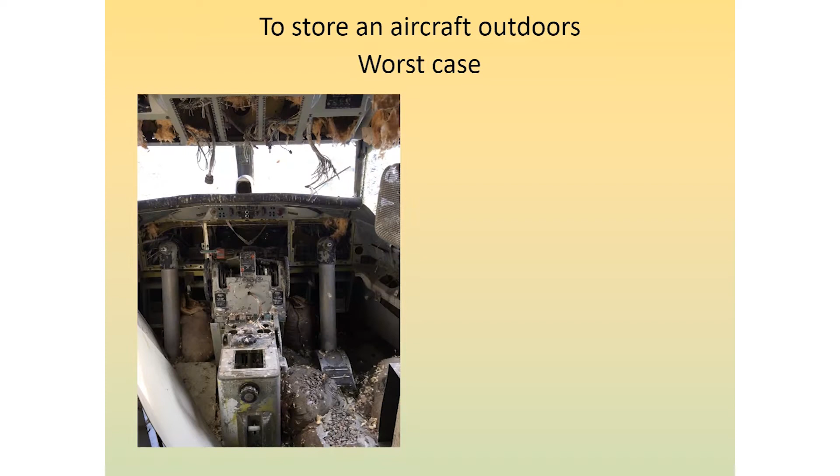This is the worst case of outdoor storage. This is a Metropolitan, Convair Metropolitan. I wouldn't say it is stored - it's sitting at Bromma Airport, and it has been there since 1977, in that shape.

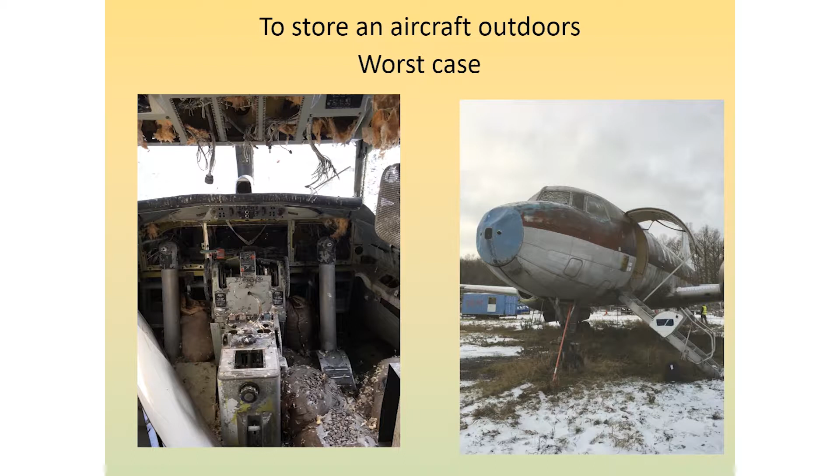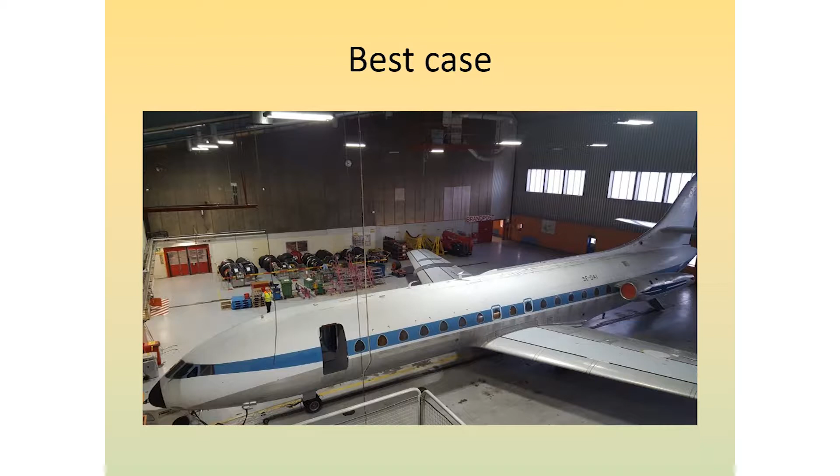That's our next project. Our best case would be to have it inside somewhere, but we don't see how it will be accomplished. This is our case.

It is stored presently at the air side of Arlanda, which means access is via the normal security procedures and a 10-minute walk. We have visitors 50 times a year or so, and everyone has to request prior permission. However, the staff at the airport is very interested and helpful in every way.

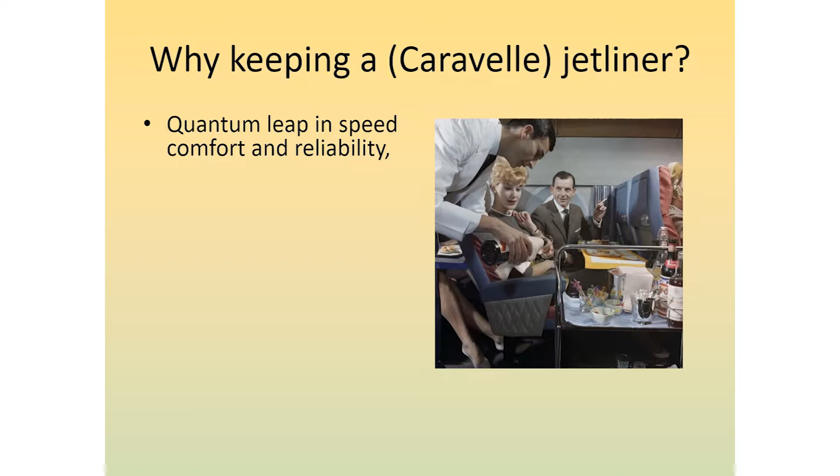Why do we keep a Caravelle? Why is it important? Because it's the only airliner kept in Sweden, and it represents a quantum leap in speed, comfort, and reliability. Less vibration, less noise - you're leaving the noise behind you, flying high over the clouds. The Caravelle does about Mach 0.65, at 30,000 feet, with very little vibration.

Vibration is interesting, because in the old piston-powered aircraft there were vibrations from the engines, propellers and so on. But in the Caravelle, very little vibration, and that had the effect that the electromechanical instruments - sometimes you have to knock on those. So if in those days you asked the guy, 'what time is it?' and he went like this, you're a Caravelle pilot.

That means during this time, safety has improved by a factor of 10 or so. If you scale that to today's traffic, it would mean that with this kind of risk level, every year we'd have 150 to 200 aircraft losses, many with fatalities. So the jet era represents a very large step towards higher safety. That's important to know.

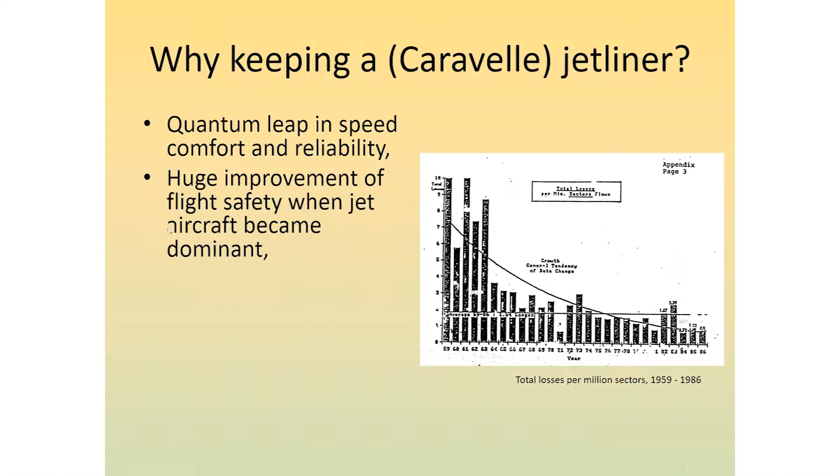The Caravelle is technically innovative: hydraulic flight controls, no wires, only hydraulic lines - unlike the later Airbus, which are electric. Rear-mounted engines, rear stairway, like that. So those are very new items and features for the Caravelle.

And the window design is interesting too, because we have the broader base down below. That means you can have better visibility from the cabin on the ground.

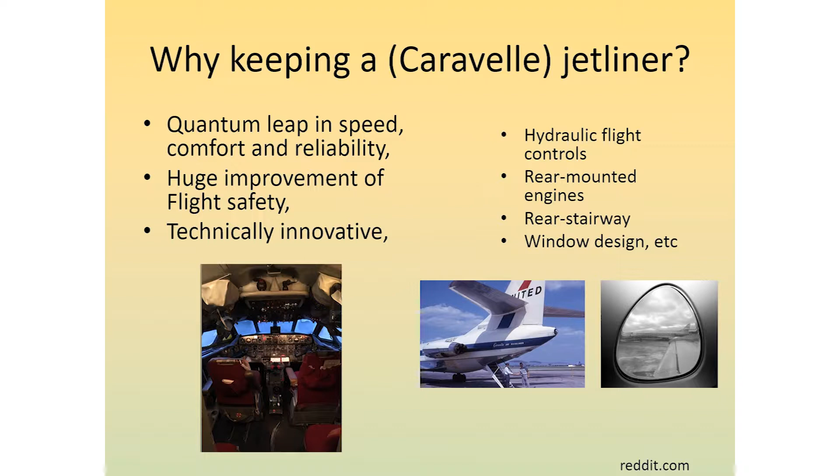And it's also an example of UK-France cooperation. This is the de Havilland Comet, and in fact the nose section is bolt-on from Comet to Caravelle. It's the same cockpit.

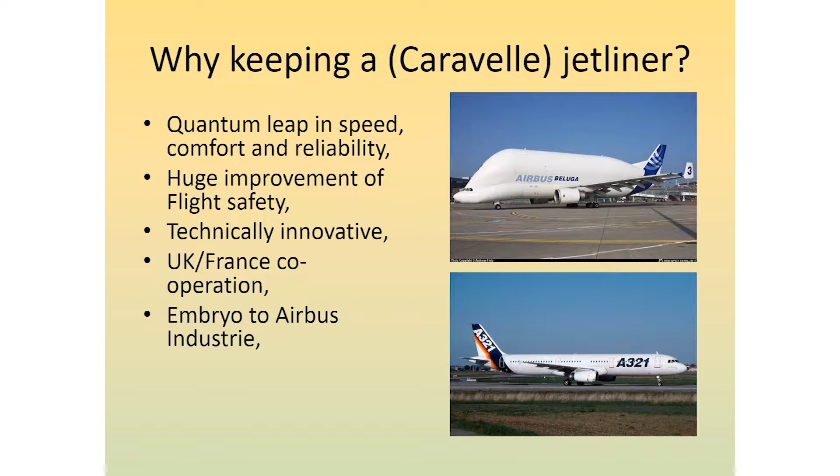And it's also the embryo to Airbus Industrie and Airbus 321, and this ugly one. So it's interesting just to keep the Caravelle. It was also the premier jetliner with SAS in 1959, and it's beautiful, isn't it?

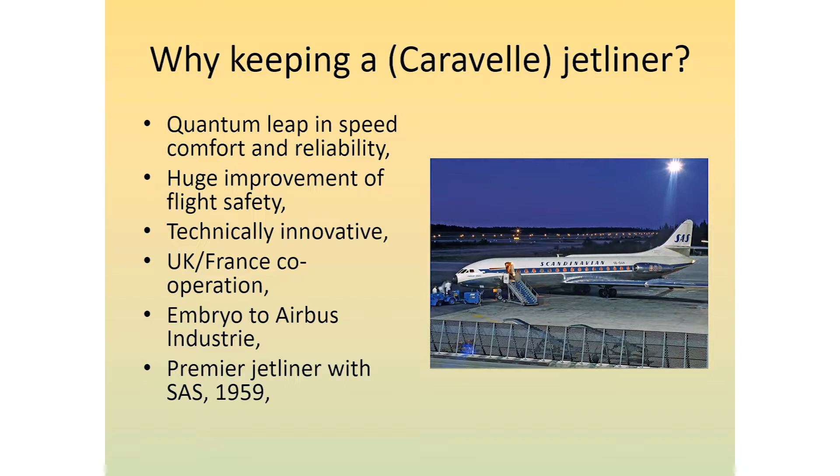So that's why we try to keep this one. We keep this Caravelle in serviceable condition, and that's important. That's interesting, because we try to keep all systems go.

This example was delivered to SAS in '66 and then to the Swedish Air Force. It was only 5 years when it went into the Air Force, so it was a new one. And then to the Air Force Museum in '99 and on, and we were given right of disposition and the storage agreement in '99.

However, we have 8 containers of spare parts at Arlanda, and the club bought those from the Air Force for 1 krona back in 1999 or something. And that is a problem, because they are crowded with boxes, with flaps, leading edges, wheels, landing gear, and so on. We can't even get into some of those, so that's a problem to have all those containers.

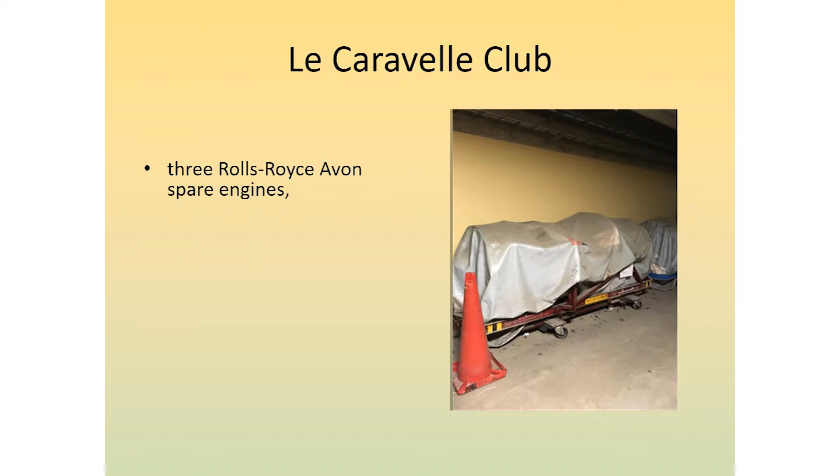And we have 3 spare engines, at least 2 of them are serviceable. And who needs a Rolls-Royce even today? If you have a Hawker Hunter, maybe.

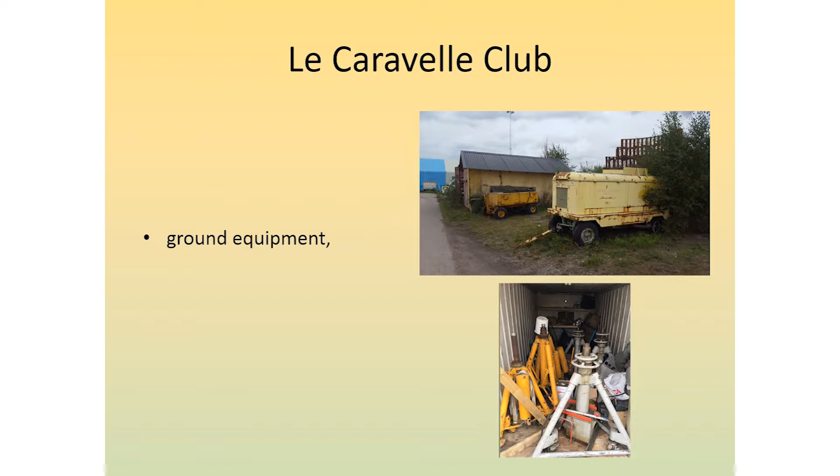We have ground equipment. I don't know how they got in possession of all this equipment, but it's a problem. We have got rid of some of them, but still we have very much items that are surplus that we don't need. We have sold some of them or leased out.

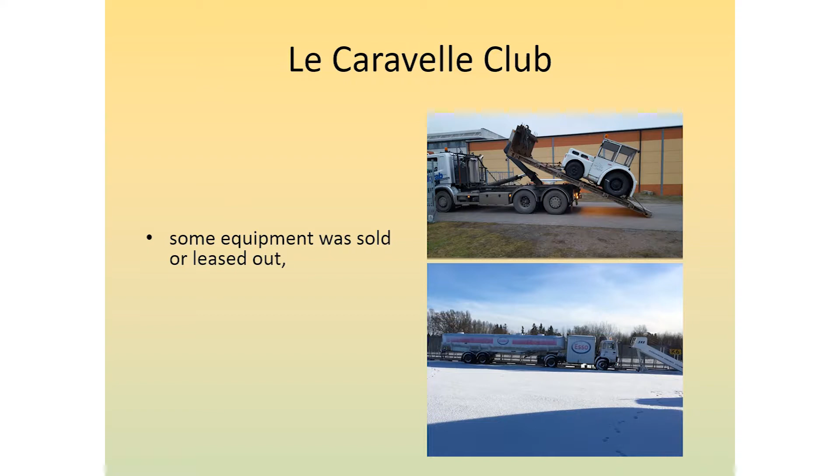That fuel truck was a big headache during the spring. It was at the airside of Arlanda, and Swedavia Arlanda were more and more pushy that we should get rid of it. We couldn't give it away, we couldn't sell it, we couldn't do anything with it, because just think of that one on the street — you fill it with some kerosene, you have a hand grenade or igniting thing in it, and just drive it into a crowd or something. So that was a real headache. We got rid of it to a scrapyard.

Yeah, we have an office at Arlanda. It's by goodwill by SAS. Ulf is a great negotiator, and he has a network that is very, very broad at Arlanda and at SAS, so we have this office at our disposal.

The aircraft itself, we have displayed it in 3 motion pictures. The latest one was last summer, the movie about Ted Gärdestad, and that's from those recordings. And before that, another documentary of a Swedish singer, and also a Finnish production earlier on. So this gives us some economic compensation.

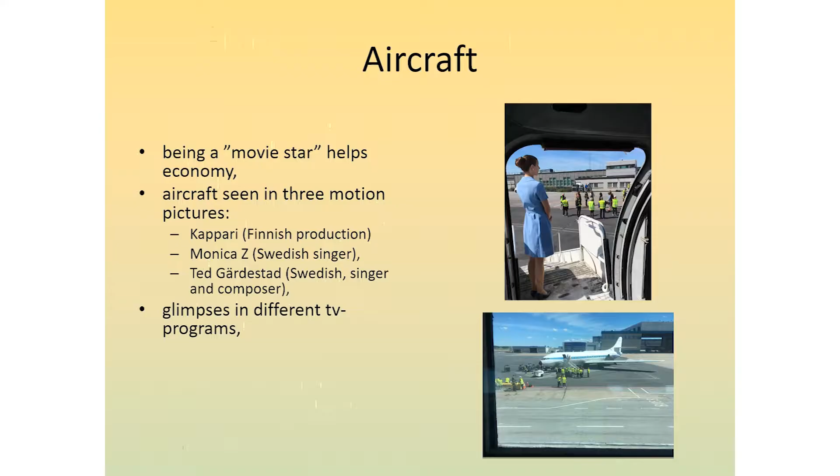The aim of this Le Caravelle Club was from the beginning to keep the aircraft in flying condition. That's why we have all the spare parts, the engines and so on. However, since 2003 there is no type certificate, so it is not possible any longer to get it into flying condition, but still we try to make all the maintenance and repair to flight standards.

And it should be ready to taxi on the tarmac. I think that will be within a month or so. And the goal is to restore it to its exterior that it was when it entered SAS, and show it to the public, which is not easy today when it is at airside.

It is important that all volunteers and visitors be informed of safety rules and covered by insurance, because we will be responsible if something happens. And much can happen on an airport or in an aircraft — people can fall from the stairways and something.

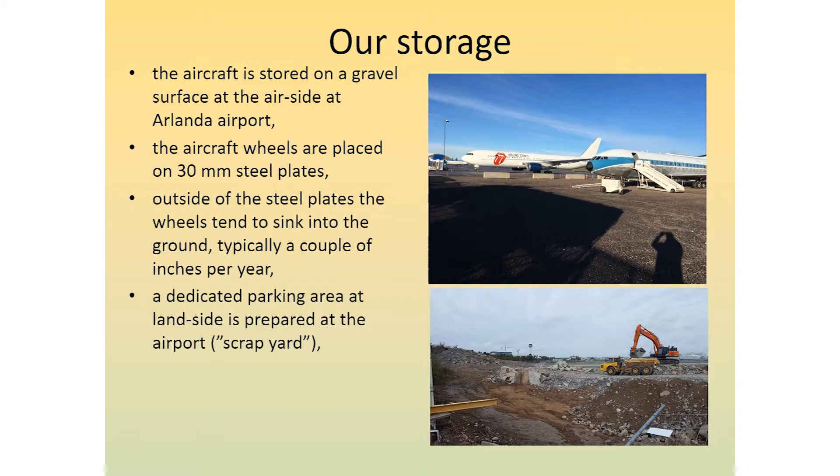The wheels are on the gravel surface, placed on steel plates. Outside the steel plates, the wheels will sink a couple of inches per year. That's a problem when we try to move the aircraft, because we connect the tow bar, and the tow bar is connected with 3 shear pins, and those will break if the wheels have sunk. That's why we have the steel plates.

Right now, a dedicated parking area is being prepared outside the fence at the land side. It's very near the Arlanda collection of aircraft, Flygsamlingarna. We hope that this will be finished in January, when we have to move the aircraft to that place.

That's good and that's bad, because inside, at the air side, we can easily be towed into a hangar and have maintenance done there. When we are outside, this will be more of a problem. They have promised that the fence between this area and the air side would be a fence that you can more or less easily remove and go away with the aircraft into the air side.

But at the same time, when you do that, you have to do a security check. Every part of the aircraft must be inspected. Bellies and all compartments and so on must be checked by security personnel, and that takes some time, and probably there will be some cost for it too.

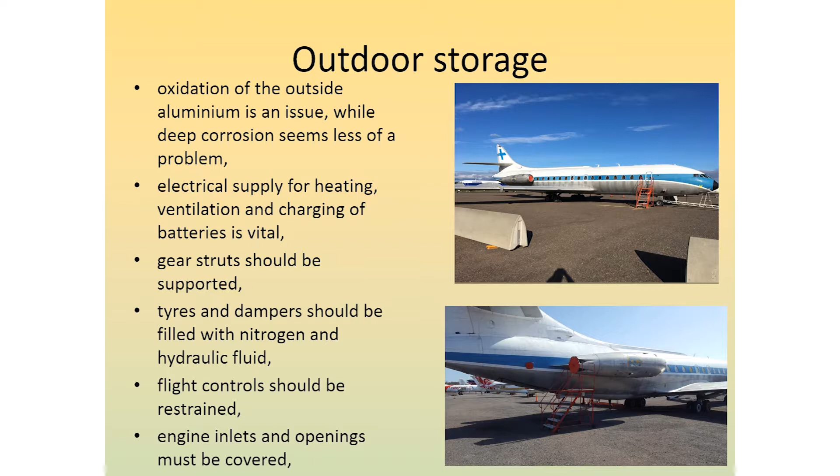We have to inspect it regularly, of course, to check for corrosion, which has not been a problem, leaking shock absorbers and such. We use the pre-flight checklist for pilots as a good routine to start and do the walk-around check. Also the movable surfaces should be moved regularly to keep seals and such in good shape. So that works very well.

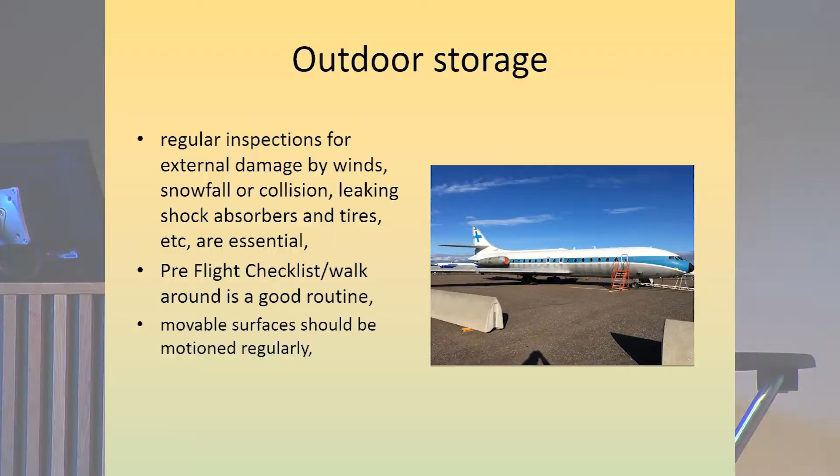You can see on the fin there's a Finnair marking, and when it was in that Finnish film Kapari, it was marked with Finnair on the upper fuselage. We removed that last summer. It took some 100 hours or something.

Yeah, but still the fin is left, and we can't do it because we need a sky lift, and the sky lift is not allowed to be used on the gravel surface. Also you have got to have a certificate to use the sky lift. So that will be done when we are towed into the hangar, which will be in a couple of weeks, we hope.

Inside, we have opened the outlets, the original outlets, and let the air conditioning go that way. As I said, there is no problem with mold or moisture or anything between the walls and behind the panel, so it's okay. It looks very fresh, and I think it smells very fresh too inside. Yeah, we have a unit that is connected continuously.

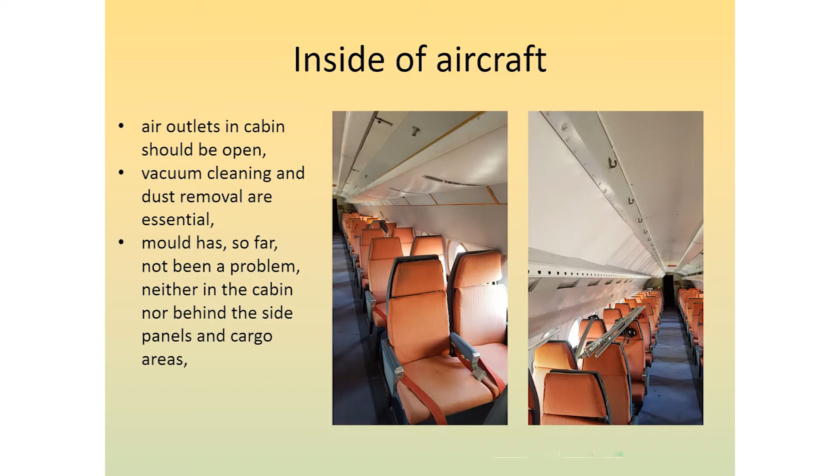Yeah, that's what we said. You see, we still have the Air Force marking on the engine nacelle, and that one is painted, so it's very hard to get rid of it.

And the cockpit, isn't it nice? It's a very roomy cockpit compared to the American aircraft of the same time. You can have the yoke or the steering column come up from the left at the wall, goes up 45 degrees, and then you have the steering wheel.

That means you can sit in a normal way, like this, because it comes up like this. Not like on the Boeing, where sometimes they have to sit this way. And also, it is wide on the side. You can place your cup of coffee, which is very important.

That's no joke. When you fly 10 or 12 or 14 hours like pilots do today, you must have a possibility to eat and drink during flight. You can also have a lap tray and eat this way. If you fly the Boeing, there is nothing. You can't even place a coffee cup there. There's no place to do it. You have this column, you have to sit like this.

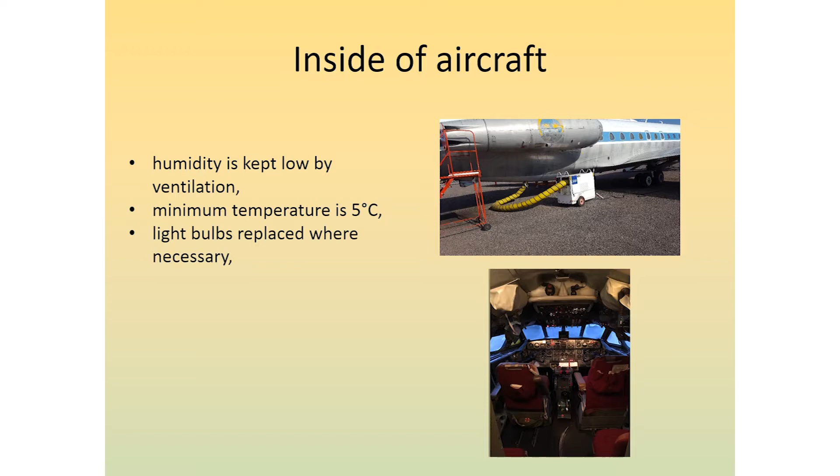Isn't it nice, the cockpit, when the lights are on? Another thing we have to mention is that when the Air Force used the aircraft as a reconnaissance aircraft, they threw out all the light tubes because they could produce radio interference, and substituted them with light bulbs. So in the cabin ceiling, we have 2 rows of light bulbs. You don't see them - it looks like light tubes or something, but there are more than 200 light bulbs in the ceiling, and altogether, let's say 400 or 500 light bulbs in that aircraft.

Yeah, I can say something about that picture below. These are the batteries. There are 6 batteries and one emergency battery, and they were out of service when we took over this aircraft. We had them restored at SAS at Arlanda, and we also had to change some of the cells.

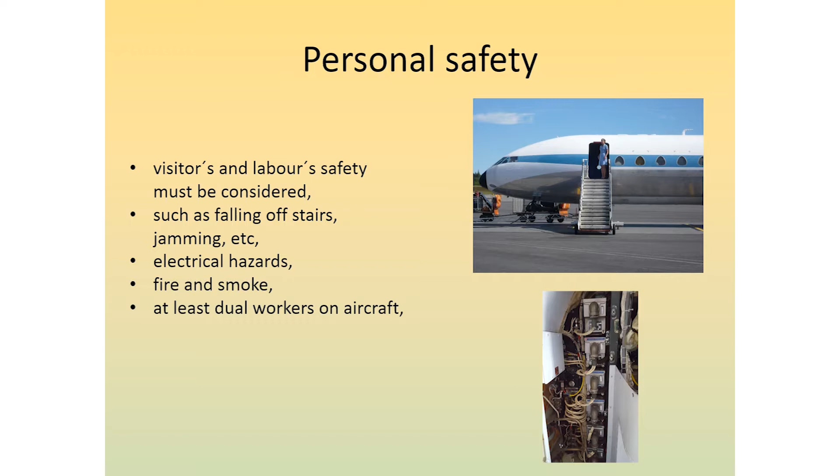But this is an area where visitors can hurt themselves or could produce some damage, so that's something we have to keep in mind when we are taking more visitors through. We had some problems with the hydraulic pipelines you see to the right. There are 3 systems for flight controls, and one of those pipelines was leaking - not due to corrosion, but a porous structure that was probably there from the beginning. So we had a new one produced and installed, and we also exchanged another one that wasn't leaking but was bent in a way it shouldn't be.

The cells cost about 40% of our budget, so that's a problem too.

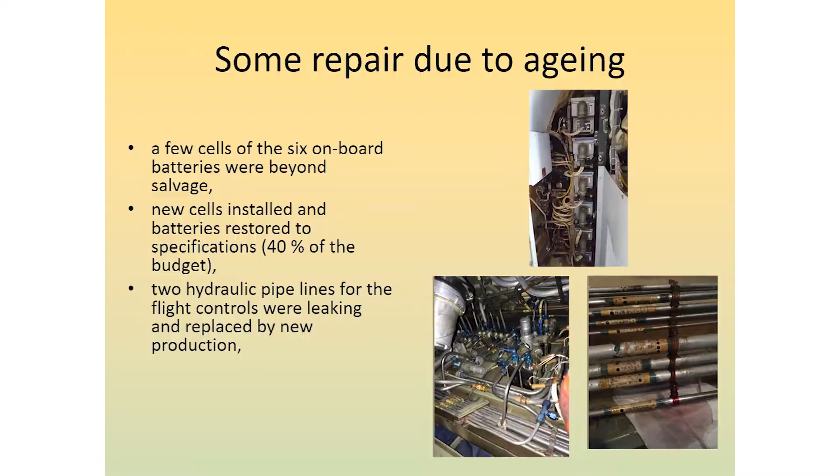The interior is, however, missing some parts that the Air Force threw out when they took over the aircraft - basically the forward galley and the aft galley, and also 1 toilet. We have 1 toilet left, the turquoise one. The other toilet should be pink colored.

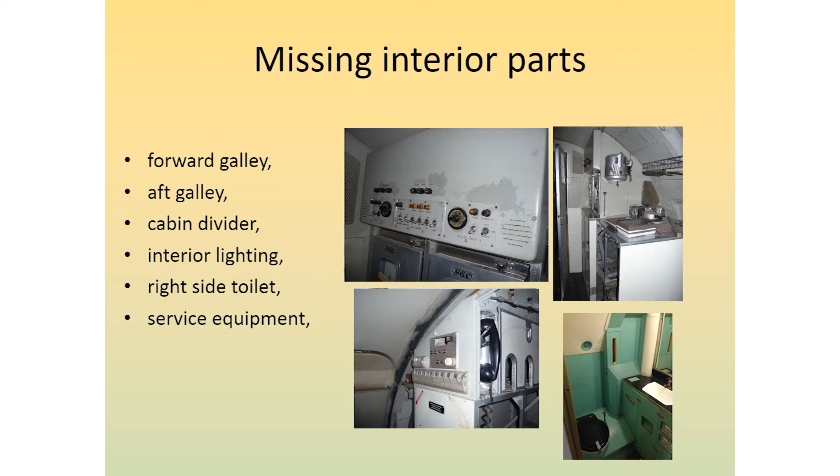So we're trying to get hold of those items. I can tell this small group that we know where we can get those things, but Ulf hasn't negotiated that yet. And there you can see the original light tubes in the ceiling.

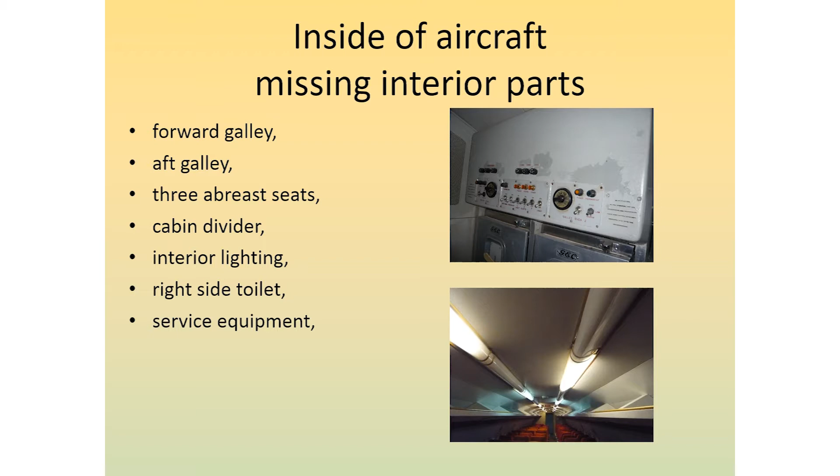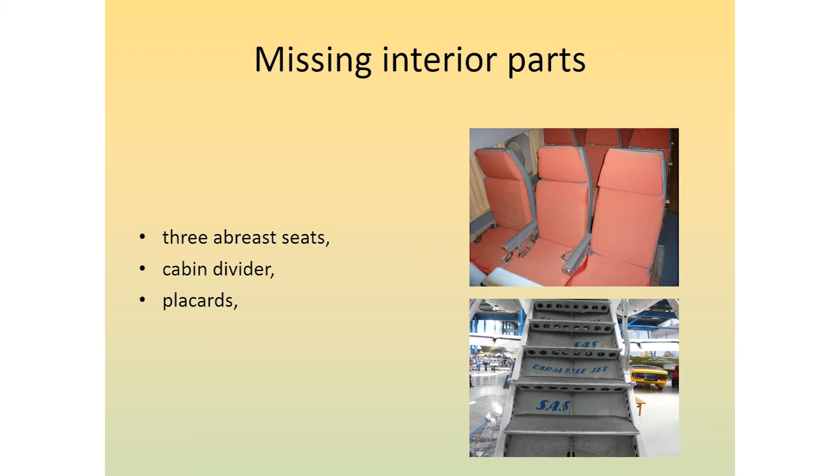We have been on the roll, and that could be a problem too because the modern trucks that fit under the nose wheel and lift it up, they don't fit because of the landing gear doors and the nose wheel. So you have to get hold of one of those old trucks, and also a driver that can drive the old one.

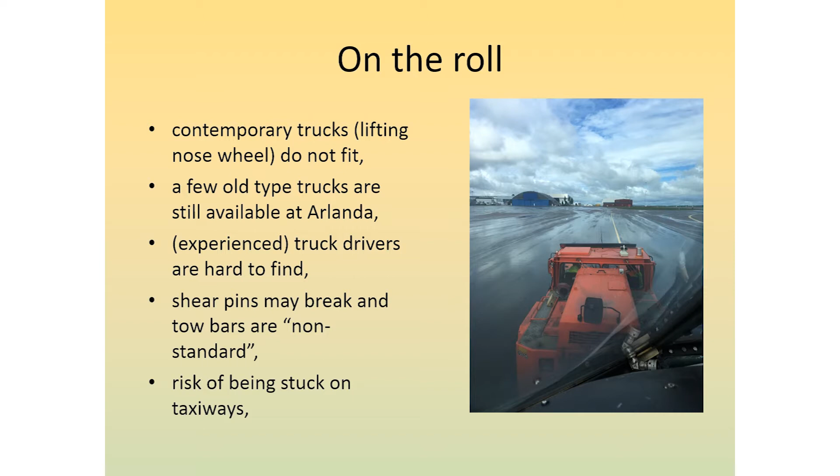Not everyone is competent on that. And the shear pins I mentioned, when we moved it last summer, the shear pins broke and we were stuck, fortunately on the gravel surface where we are parked. But the problem is if those break on the taxiway, we close the airport more or less. So that must be fixed.

We have produced new shear pins of better steel, and I hope that will be stronger. In 10 days or something, we're trying a new taxi, to be towed into the hangar for a week.

Weather protection, I think we have talked about that. Ceiling, cockpit windows always leak, for some reason, emergency exit cockpit window. And that is also the case on the modern aircraft. You wouldn't believe it - when in heavy rain you sit in the cockpit and taxi out, sometimes you need a raincoat or something over your left leg because it's leaking before you get pressure inside, and it will tighten up.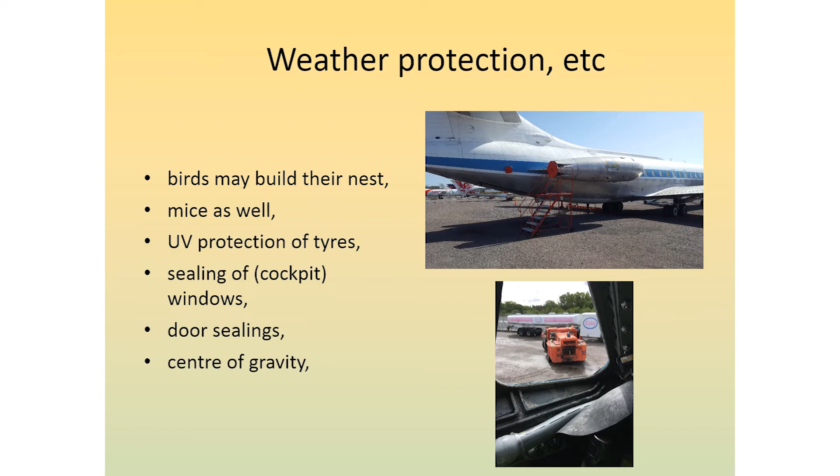Center of gravity would also have to be considered, because when passengers or visitors came in via the aft door or via the forward entrance door, we must be sure that it doesn't tip sitting on its tail. That must be checked. We have lots of fuel on board this aircraft - I just wonder what Chris thinks about that. Also hydraulic oil, but as long as it is on the air side, I think it's not a problem. It could be later on.

And we want that as long as we are at the air side, and we are going to start the engines. We have cranked one of the engines, and that was interesting. The starter is electric, and it takes about 1,000 amperes. You can feel it - really, really, you can feel the power of it when you push the button and it starts cranking. It's a scary thing.

But soon we will light up too, I hope. That will be fun, to hear those engines again. And then we'll taxi.

Yeah, that is our vision, and we say that all maintenance and repair should be to the manufacturer standard, as if the aircraft was airworthy. And documentation and all actions also documented. We try to plan ahead - what are we missing, what are we going to do?

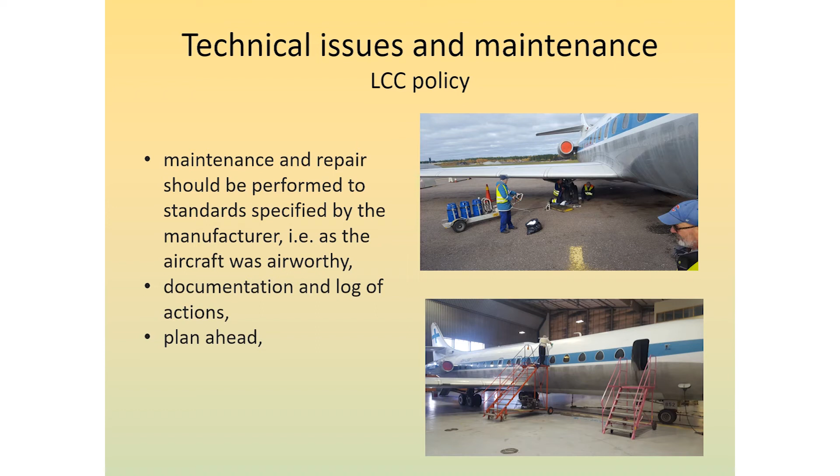The door on the other side, the main entrance door, it slides up like this when you open it. And behind the scenes, there are bicycle chains leading all the way down to the floor and down into the cellar, where it connects to wires. And those wires go all the way to the wing, turn 180 degrees, and come back under the floor and under the door. And there you have rubber amortisseurs, like you have when you have your luggage on your car. So it's a very sophisticated construction - very sensitive, it has to be adjusted properly.

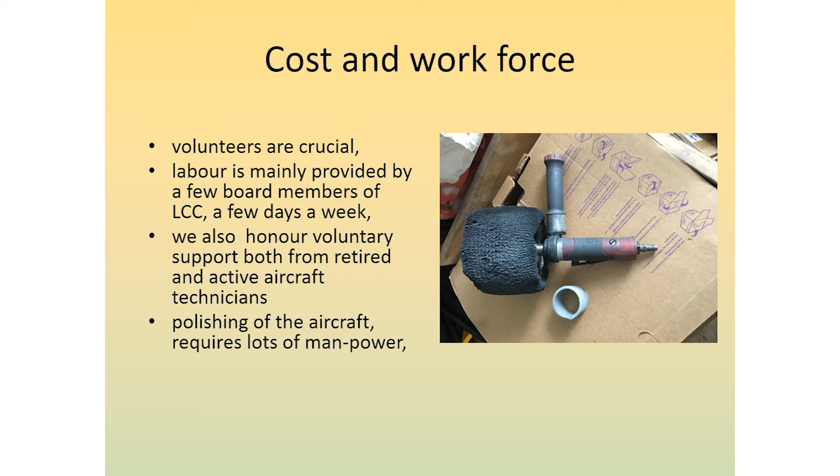Yeah, volunteers - we need volunteers, it wouldn't work if we didn't have that. Well, labor is, as I said, mainly provided by a few members of the club. And polishing is on track now - we have got support from the Heritage Board for polishing, so that will be done, I hope.

Some future issues, however: there is discussion of a National Civil Aviation Museum in Sweden. If that becomes a reality, we have to solve the ownership of this aircraft, or how it would be. I mean, from this horizon, it is a military aircraft, while we try to get it into civil aircraft. So that must be solved in some way. Costs for parking, electricity - we don't want to hear about that. Weather protection. And I think I'll stop with this one.

Volunteers are aging much faster than you think, and to recruit new volunteers is not easy, because young people don't think this is interesting - 50 years back in time, I'm not interested. So that's a problem. When we are phasing out, or fading out I should say, this will be a big problem. But that goes for all of us, I think.